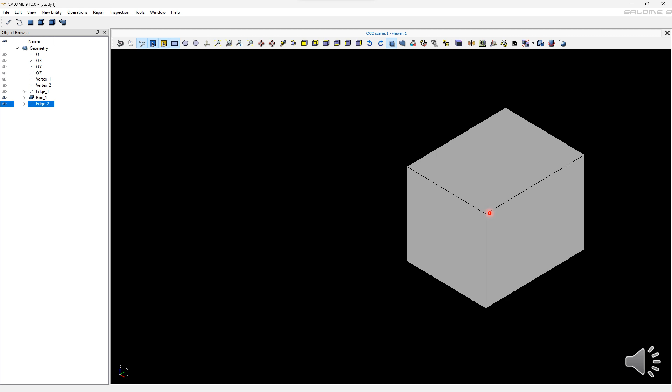In the second algorithm, we can create an edge by selecting a wire. Here I will select this wire from the view and click Apply and Close. The edge is created from the wire.

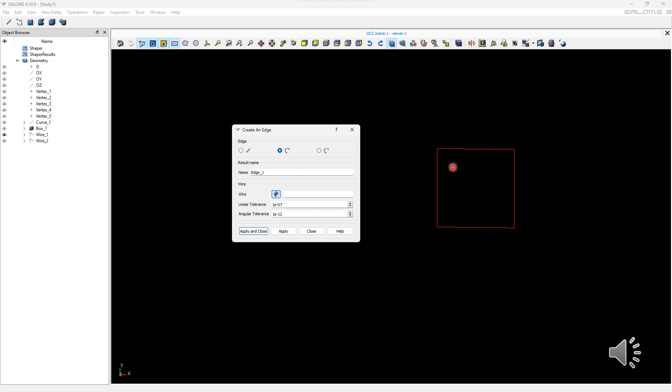We need to select a single wire to create an edge. Here I will select this wire. This is also a wire, but it has sharp edges. If I click Apply, it says that we cannot build an edge with this wire.

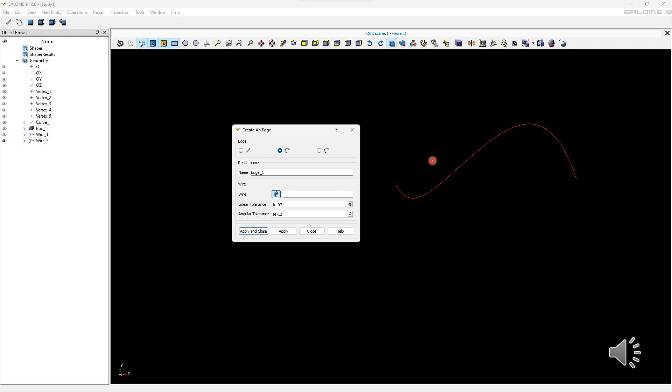Now I will select this wire, which is a single wire. Clicking the Apply button, an edge is created from this wire.

In the third algorithm, we can create an edge by selecting an edge and a point. I will select this edge from the view and choose this vertex from the edge, because I want to extend the edge from this point.

I will extend the length to -30 and click the Apply button, and the new edge is created from edge 3.

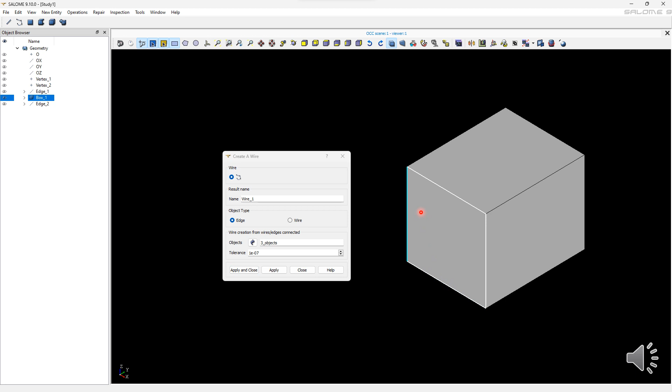The second tool is the Wire. To create a wire, we have two algorithms. In the first, we create a wire by selecting edges. From this object, I will select these 3 edges and click Apply, and this is the wire.

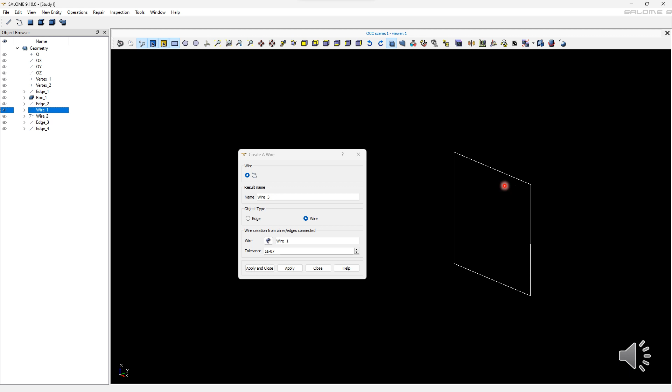In the second algorithm, we can create a wire by selecting a wire itself. To create the wire, I will select the wire which I previously created, and a new wire is created.

The next tool is the Face. To create a face, we have 3 algorithms. In the first, we create a face by selecting edges or wires. From the view, I will select these edges.

By holding the shift key, I have selected the edges. You can select edges from the view or from the object browser. Now click Apply and Close to save, and a new face is created.

In the second algorithm, you can create a face by selecting another face surface and bounding it with a wire. I will select this face and this wire and click Apply and Close, and a new face named Face 2 is created from Face 1.

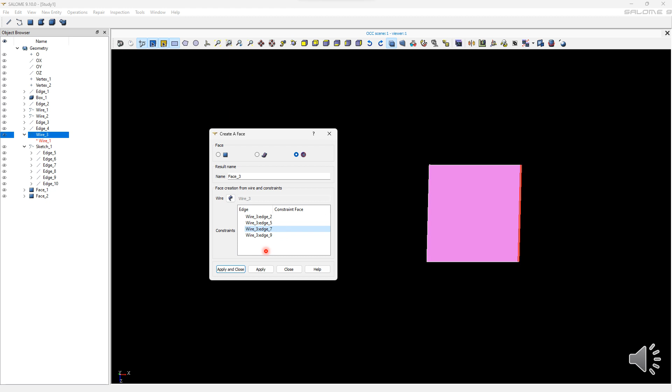In the third algorithm, we can create a face by selecting a wire and a constraint. Here I will select this wire, and it displays all the constraints in the property panel. I will change the constraint and click Apply and Close, and a new face is created.

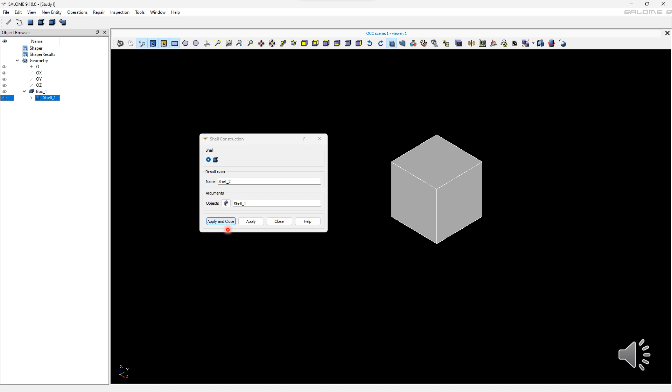The next tool is the Shell. We can create a shell by selecting shells only. I will select this shell from the object browser to create a new shell and click Apply. From Shell 1, a new shell is created named Shell 2.

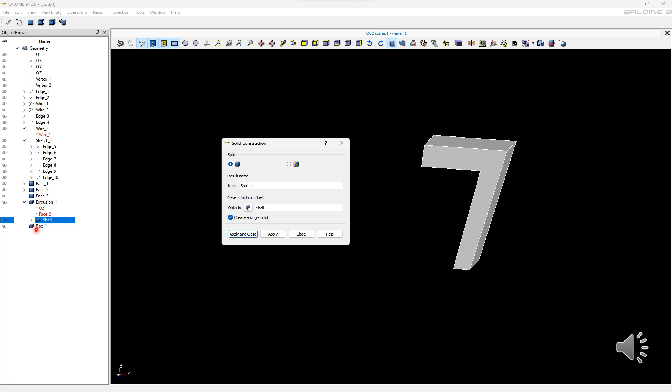The next tool is the Solid. We have two algorithms to create a solid. In the first, we can only select a shell to create a solid. From the object browser I will select Shell 1 and click Apply and Close, and from Shell 1 a solid is created.

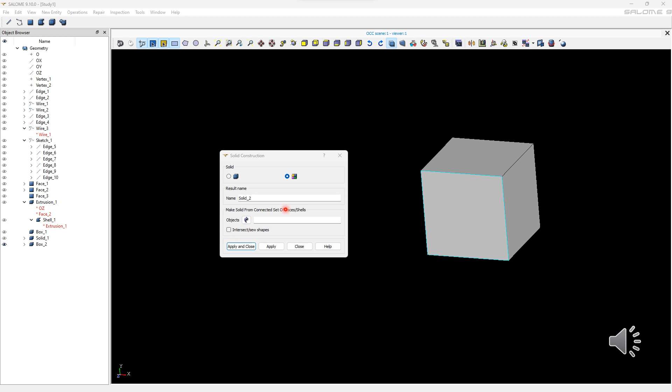In the second algorithm, we can create a solid by selecting shells or faces. I will select faces from this object and click Apply, and a solid is created from the set of faces.

The last tool is the Compound. We can create a compound by selecting shapes. Here I selected these three objects and a new compound is created.

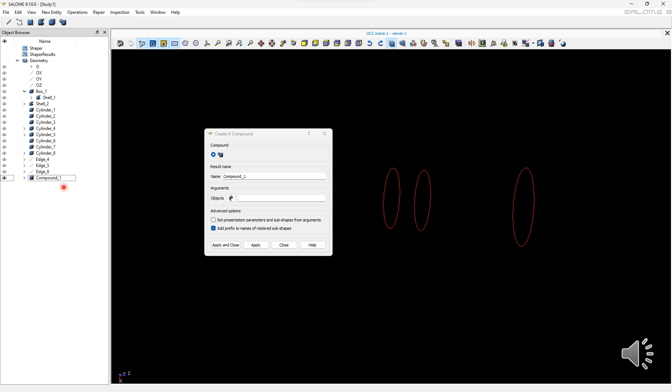And this is the end of the Build toolbar. Thanks for watching.